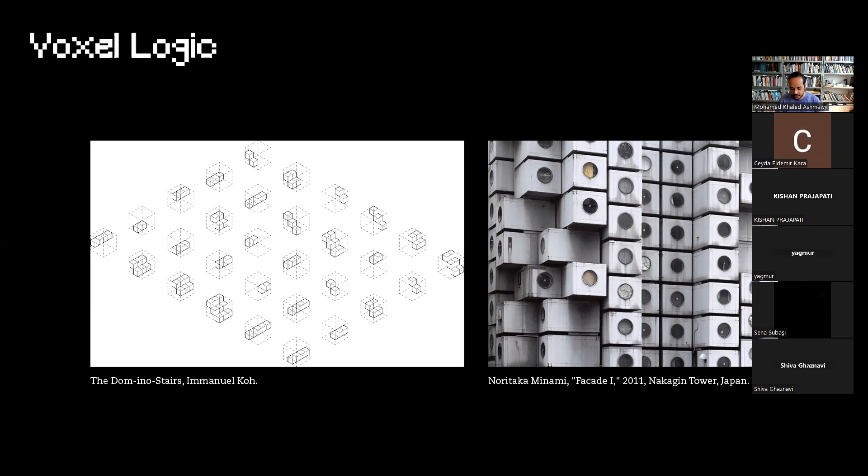And for this, the workshop is going to focus on 4 main topics in the 3 days. The voxel logic system: what is voxel logic, what are voxels, and some examples of how you can build a voxel logic system or an algorithm. And then we will talk more about gamification. We will check some examples like Sims, Minecraft. Minecraft, I think, is the most famous example of a voxel logic system that is very well gamified. How many of you actually played Minecraft?

I almost played every day. So, every day. Okay, good. Yeah. Also, Sena. Okay. Also, please correct me if I'm pronouncing the names wrong. Just please say, Mohammed, that's not how it is. Please focus.

Yeah. So I think Minecraft is a very, very good example. I got a lot of inspiration from playing Minecraft to develop the project. And then we will dive deeper into the Meta XR SDKs, how to use them to create an augmented reality or virtual reality application. We will check the new API they released, and how you can use the building blocks, which is the easiest way right now to build an application on Unity.

And at the end, we will do some C# scripting and try to develop our own Unity AR application. I will help all of you for sure, especially in the coding part. Maybe just to know, how many of you know C#, just a basic understanding of C#?

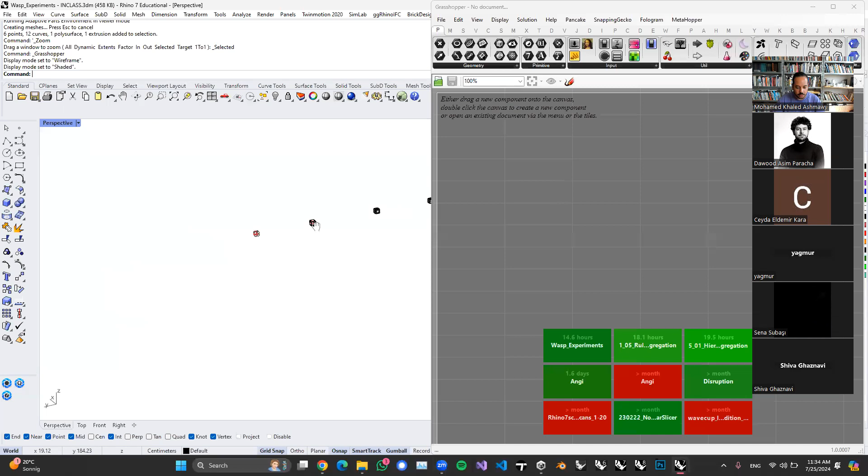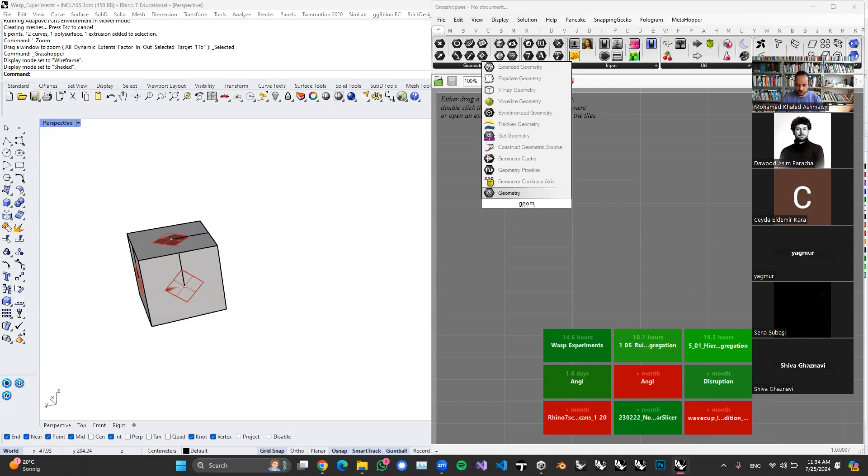So if you open the Rhino file, you will find 4 geometries here, 4 voxels, and we will start with this one. If you are completely new to Grasshopper and want to get a component, what you can do is double click on the canvas and then write the component you need. We'll just write geometry, here it is.

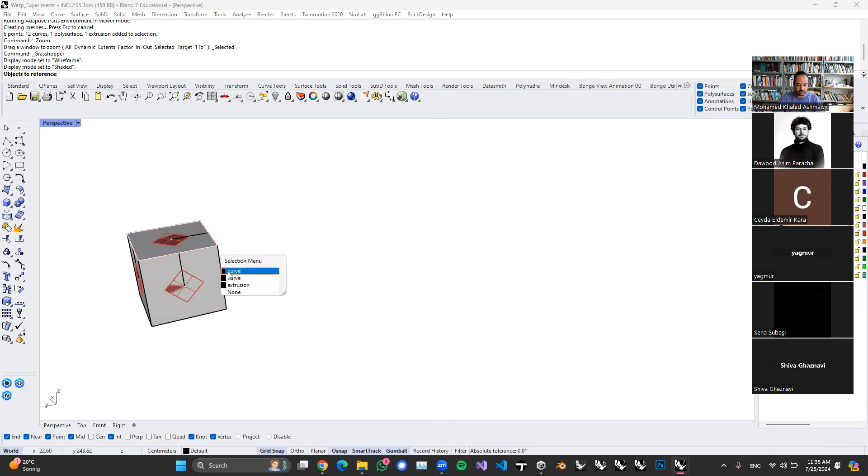One other way of doing it is to go over all those tabs. I have too many because I've been using Grasshopper for a very long time, but you shouldn't have all those tabs. So you go over the tabs and see what you need, we need geometry, we'll pick it and put it again in the canvas. If you right click on geometry, you can basically pick set one geometry, which is going to be the extrusion.

And then we will try to deconstruct this extrusion. So deconstruct BREP in order to get its faces. We need all the faces.

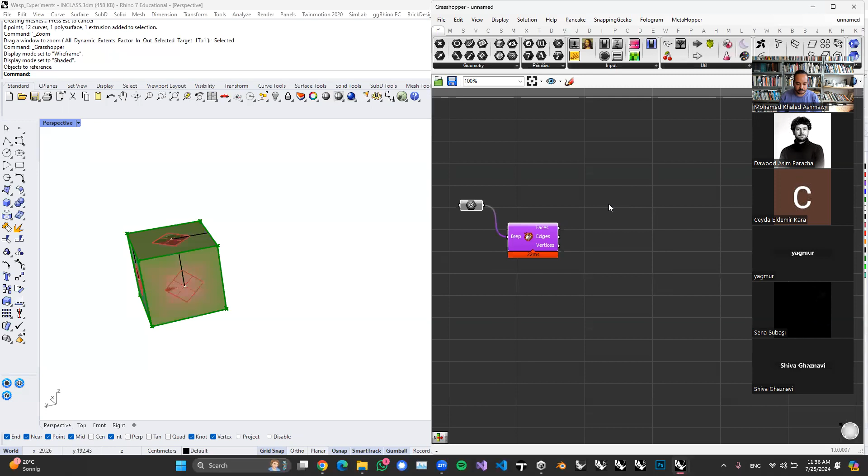Sorry, I need to explain this better. So the shape logic or the shape rules is gonna be created from the geometry itself. And in order to create this from the geometry itself, we have to go over all its faces to set up some planes. The logic actually works this way.

We will consider this as a voxel. You can see me on the camera, right? Yes, we can. Okay, great. So this is a voxel and this is another voxel.

If I want to, or maybe I'll use the cup. If we want to connect this face to that face, we have to get a plane on this face and another plane on that, so they can connect. And we connect from the center point of this one and the center point of the other one. So center point to center point, plane to plane, and then it's gonna connect. That's how it works, just to connect two basic geometries.

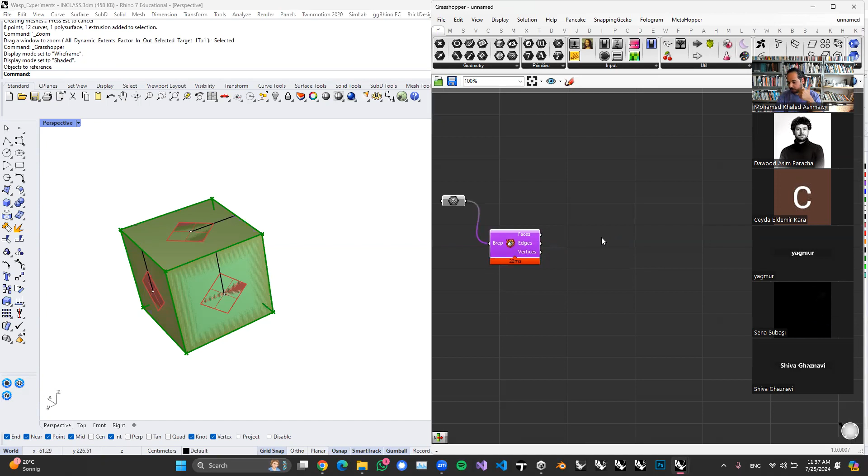So what I need right now is to get a center point and a plane. In order to get the center point, I will evaluate the surface and then reparameterize it. And then say, I want basically the point exactly in the middle. You see now what happened, right?

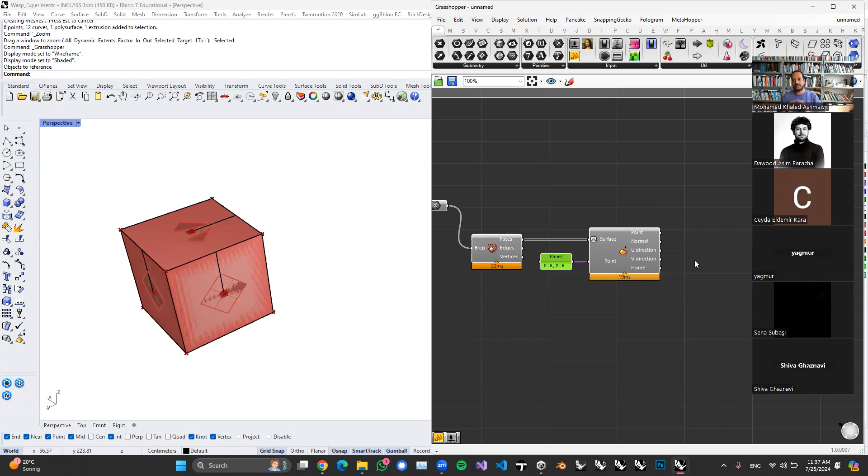I have the center point of each face and I have a plane as well already connected to it. But let's say I want a better setup for this plane. I want to define exactly the direction of the plane. Therefore, I need to use one of those two directions, the U direction or the V. It just resembles the local coordinates of this face basically.

So what I need is to create a line. And this line is going to start from the center point and get the direction of the V. You see now what happened, right? Great.

And then all what I need to do is to go into WASP. I have so many tabs, as you can see. But WASP has this set of components that you can use to create all kinds of aggregations, like most of the things you need.

As I said, if we want to have a connection between those two elements, we have to define the connection, and then we have to define the part that's going to be connected, the voxel part itself. So we will define the connection first, and therefore we need this component, connection from direction, because we already have a direction and we have a center point, right?

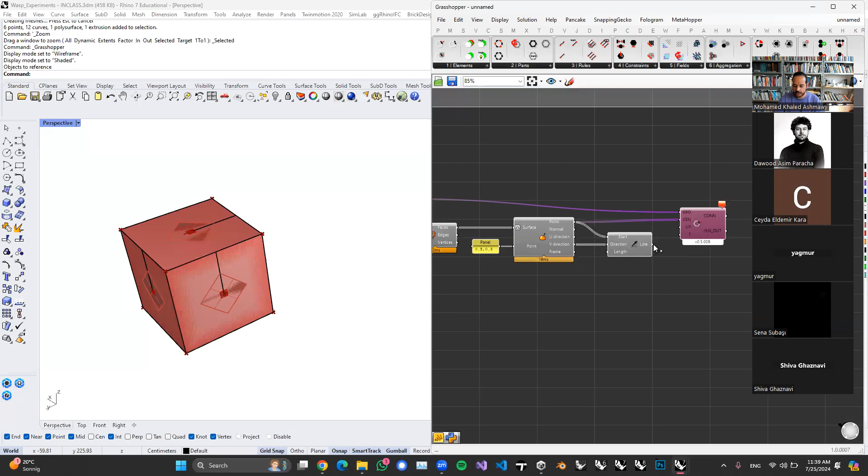So our geometry is going to be this. Center point is to center point, and direction to the line. And now we have a WASP connection for each face.

This means that every single face on this voxel can connect to every single face on another voxel. You can change this as you want. It's not mandatory basically. You can go to those faces and change its order, do whatever you want. That's up to you. But we will try to do the basic example right now.

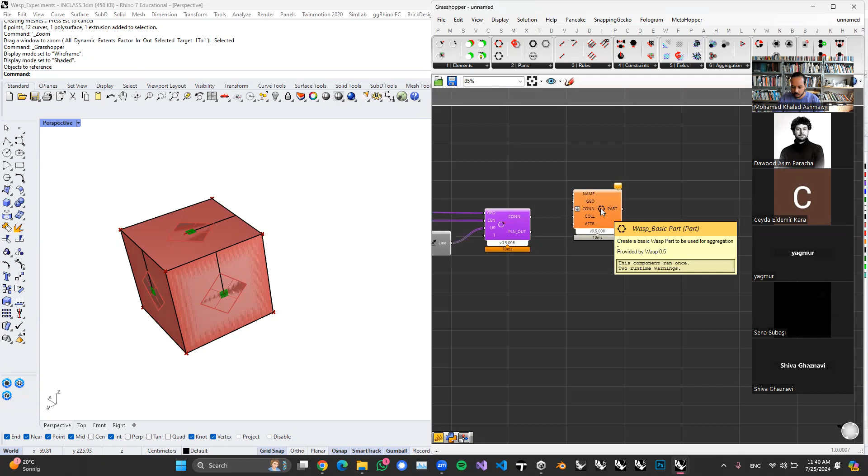And then we need to define the voxel part. Therefore, we need to use this component, WASP basic part. We have to give it a name because WASP is very sensitive to names, and how can I say it, like if you have a voxel logic, you have to be very, very cautious about naming, because naming always helps to deconstruct the shapes at the end and have more control over the whole algorithm.

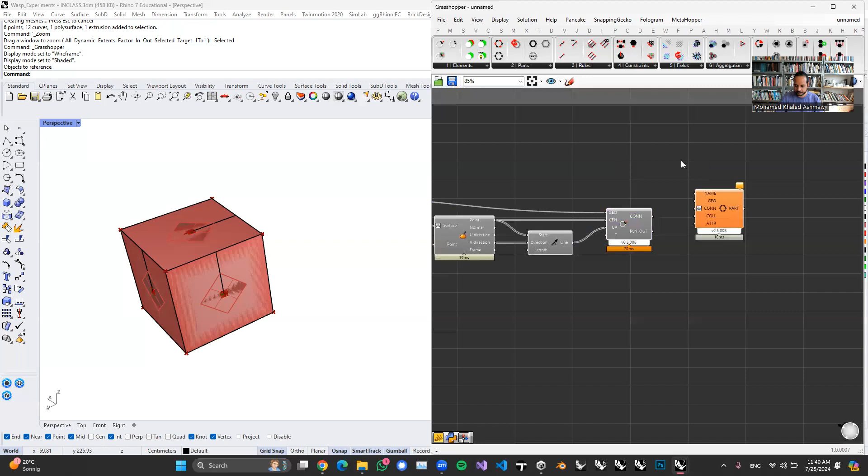And I will call it voxel. Okay. Voxel. Great. Then again, geometry to geometry, connection to connection, and that's it. Now we have a WASP part.

And all what we need to do basically right now is to do the aggregation. That's it. We will use this component, stochastic aggregation, part to part.

The number, let's say that we can start with 60 voxels. And we have to define rules for this aggregation. The rules are basically gonna be generated from the connections, right? We have already defined the connections. We defined the direction that we need, and then we can just type rules and pick WASP rules generation, because it's just gonna generate the rules from the connection.

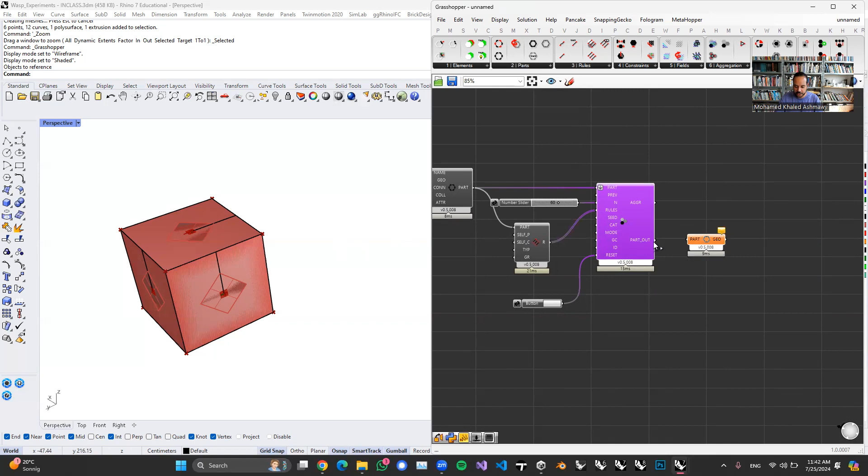Part to part, as always, and then rules to rules. Great. All what we need to do is have this button to basically reset the aggregation every time we need to do that. Okay, if I try to preview this, nothing happens for sure, because right now the only thing we have is the WASP parts. And we basically need to just visualize it. So we need to change the type from WASP part to a geometry.

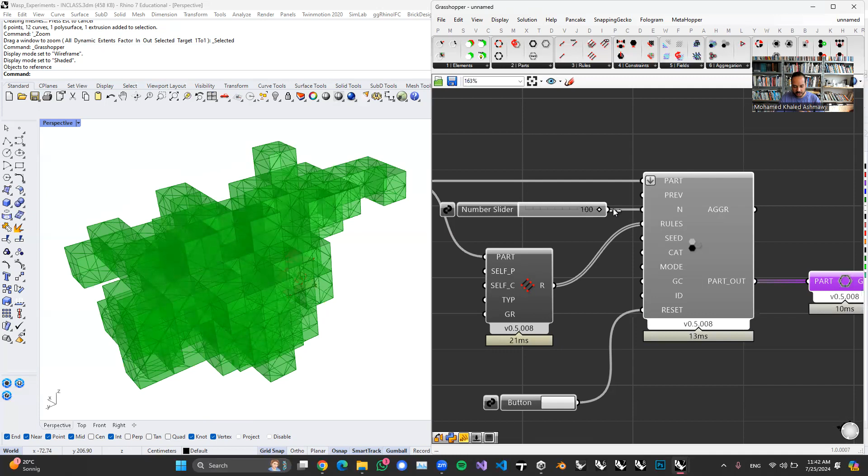And now this is basically our aggregation. We can reduce the numbers, we can go higher, and you can see that every time I change that, the order changes because it's continuously computing the possibilities. I'm just gonna start from 2. So this face goes to that face, and it goes over and over again. It goes over all the shapes, picks a random one, takes one of its faces and connects it to one of the faces of the next part. Because right now we don't have custom rules, we have this kind of random rule, but it's not really customized so far.

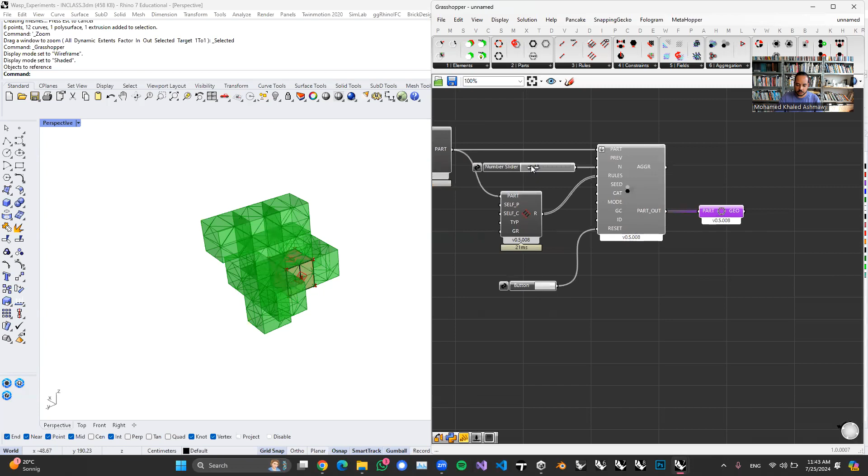So we have this beautiful aggregation at the end. If you are new to Grasshopper, you can type custom preview, and then you will have a material for your shapes. If you want to change the color, type swatch. We can pick this beautiful pinky color, and you can change the opacity, change the intensity of the color, do whatever you want. So that's the basic example of a WASP aggregation algorithm.

Is this clear? Give me thumbs up if it is. If it's not, please also ask your questions.

Please, can you use the bifocals component? Yeah, sure, okay. No, thank you. Better? Yes, thanks, okay. Yeah, thanks for reminding me. Actually, I also wanted to do that, but I forgot. Okay.

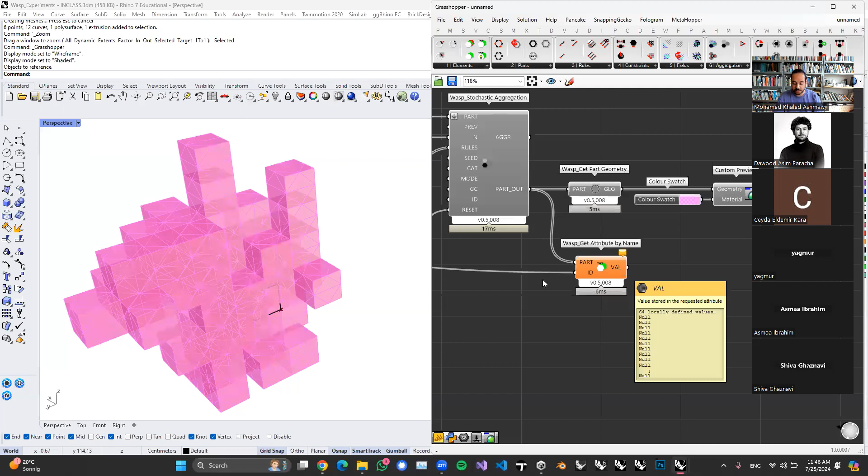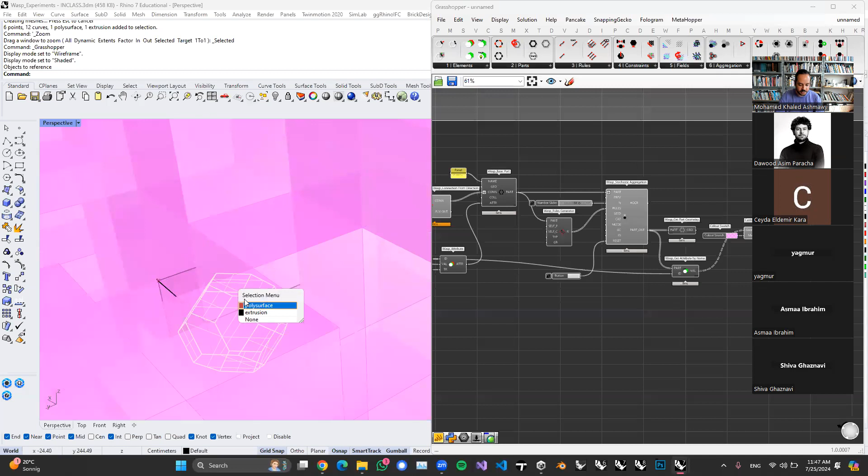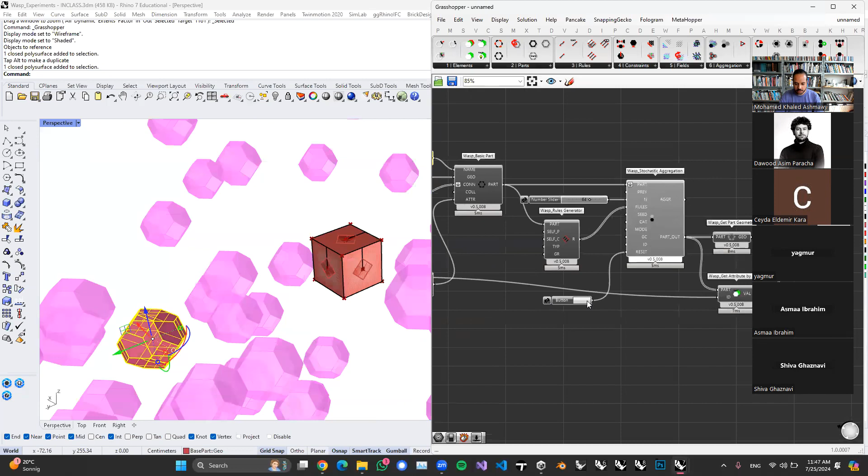This actually works for almost everything that can fit inside this box. I have already prepared some geometries — as you see, this amazing octahedron, we can already use it as an attribute. So I will define it the same as a geometry, set one geometry, put the geometry inside the value, and then... yeah, because it's okay.

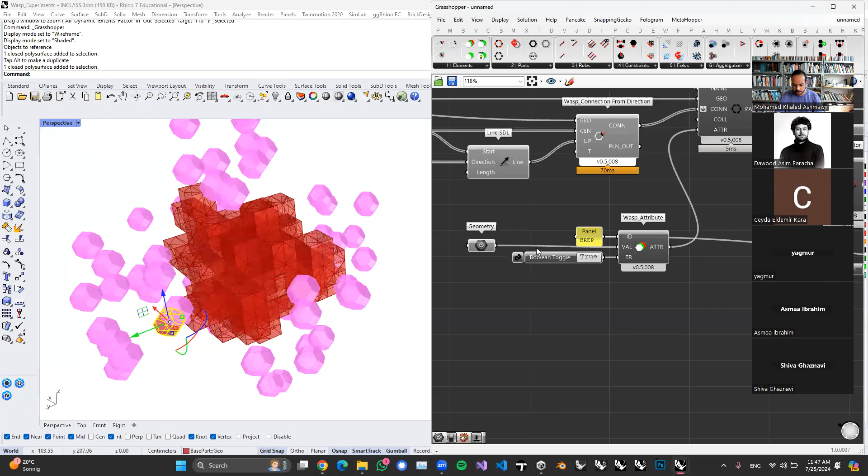That's actually quite interesting to happen. Okay, no, I know why. Okay, sorry for that — it has to be actually in the same center point. So...

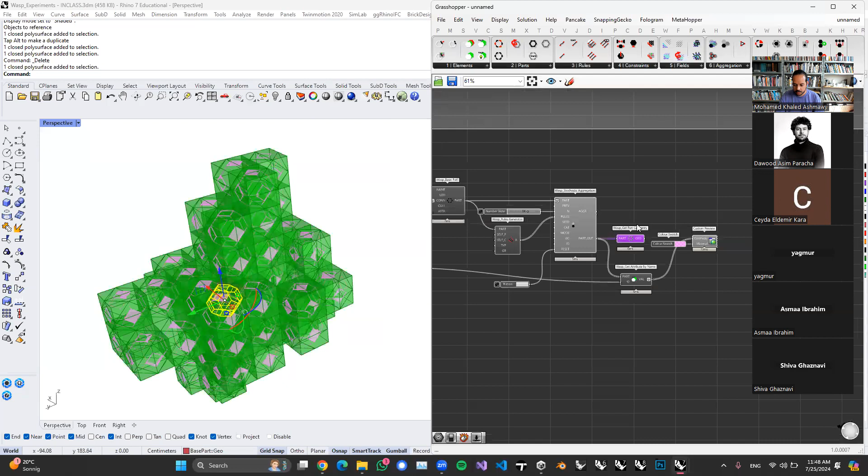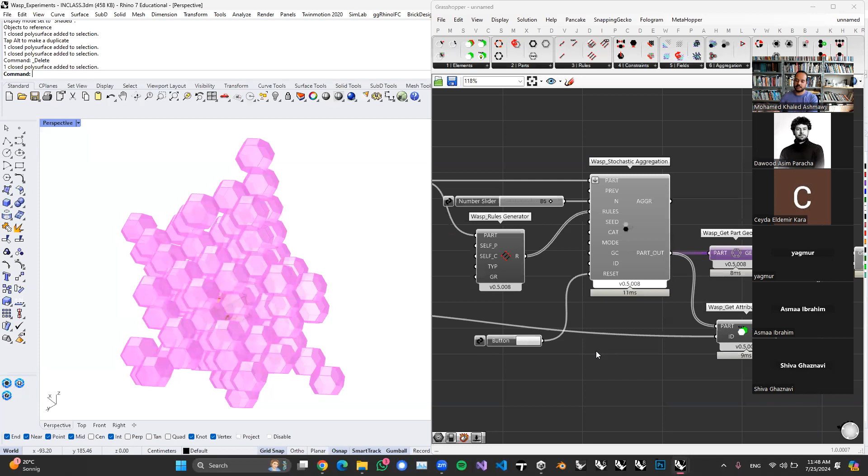Yes, now it is. So as you see, this is basically our initial voxels, and those are the aggregations that it's gonna fit inside. It works the same way, exactly the same way. I believe this is actually the beauty of voxelization — whatever you want to voxelize, whatever you want to aggregate, just fit it inside a voxel and aggregate this voxel, and then you are basically done. If you just need to get a hierarchical aggregation of any shape, fit it inside a box, do the hierarchical aggregation for this box, and then you are good.

So, is it clear? Do you have any questions? Okay.

In the file you have, I already prepared multiple shapes to fit inside. So you can play around, you can use the octahedron, you can use those kind of cross structures. Just try to play around and understand how it works. And as I told you in the beginning, we will try to deconstruct every example that I have showed, and therefore now we understood how voxelization can work using WASP.

Let's actually try to set this up for the Nakagin tower and check how it works. How can we actually create the same shape in the same order and have infinite aggregations out of this?

I will do almost the same setup. Nothing is gonna change, only a few things. If you want to follow up with me, use this voxel here. In this voxel, I have two things basically — I have the extrusion and I have the poly surface.

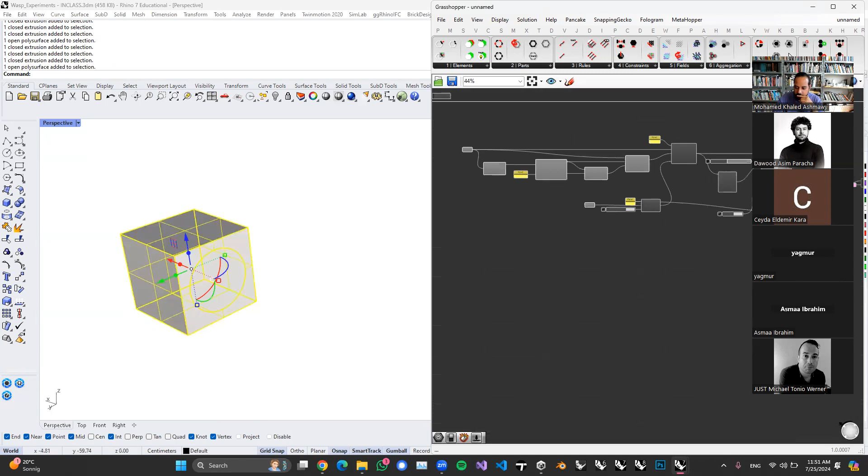Okay, now it's time to create the tower, right? And to create the tower, I will basically use the same setup. Not a lot of things will change. I will use a geometry. In the geometry is gonna be the extrusion, the voxel itself, set one geometry. And then I will start to create the connections.

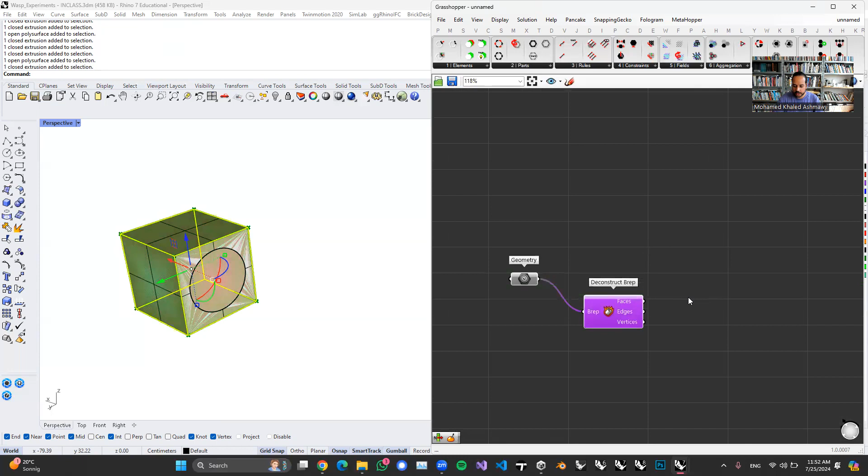So I will deconstruct the BRep. It's really interesting. Yes. And since for this example, we actually don't need to have connections on the sides, then we need to basically have a top and bottom connection. This is our first introduction to custom rules, basically. So for that, we need to basically have a connection for the top and a connection to the bottom.

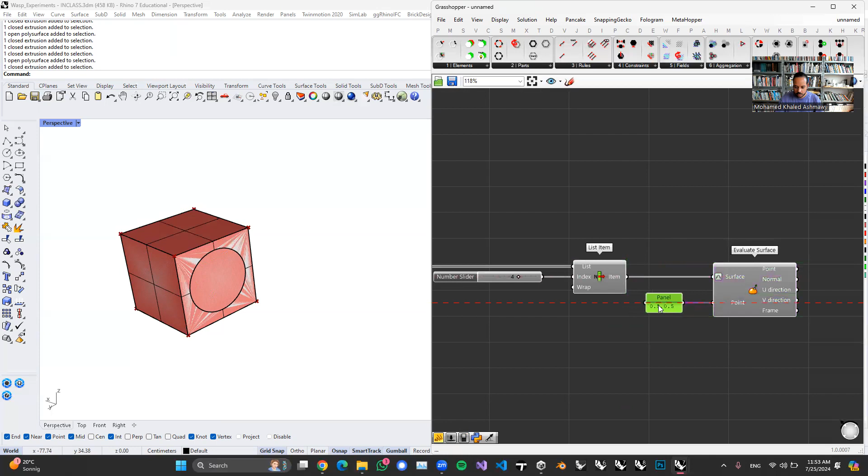You can use the list item component. 6, right? So 0, 1, 2, 3, 4. 4 is the bottom face. So this is the one we are going to start with right now in order to get the connection. And then we will evaluate the surface, try to reparameterize it so we have an accurate estimation of the points. This then should be the center point. Yes, great. And then we need to create a direction, basically.

So a line. And then we set up the directions, right? And then we need to set up the connection. So connection from direction. Again, geometry to geometry. Center point or points should be basically the points of those lines, because now I have two. So I'm gonna use endpoints to get it. And this is basically the direction. And now we are good.

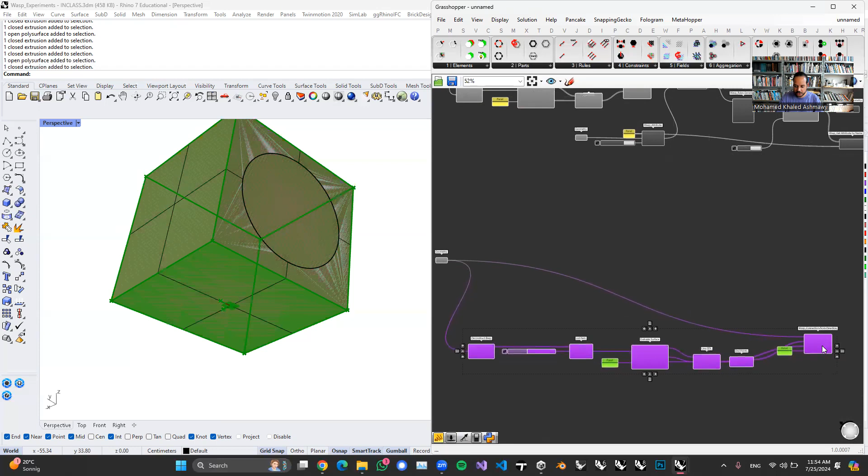One thing that we can actually do here is to give every connection a name, because we have multiple ones. So we will call this bottom. That's the first connection. All we need to do is just copy paste it to create the other connection. We will go here and see which one is the face above. So it is basically number 5. And then we have already the lines, we have the directions, we have everything. As I said, it's a parametric approach, so it shouldn't be a big problem if we just copy paste stuff, change one thing, and everything is gonna work the same.

Great. Now we have connections, but for this one, we need to change the name to top. Great. And I think now we are good. We need to create the part. For this one, we will use the advanced part. Personally, I just want to introduce you to it, but you can also use the basic part. It doesn't matter. We will give it a name, and we can call it capsule, because they call the parts in the tower capsules, right? So geometry to geometry, connection to connection.

And we need to basically set up attributes. Why? As I told you, we use the attributes to basically fit anything we want inside the voxel. And this can work for multiple objects. So if you want to put this cup basically inside the voxel, you can, no problems. But you can also add more details to your voxel. So if you have windows, if you want to create some kind of, I don't know, slabs, columns, whatever details you want to add to this voxel and put inside, you can use the attributes for this, okay? So we are going to have an attribute for

So we go back to Rhino. And we will do the first thing first, to have a groove detail. I will call it detail.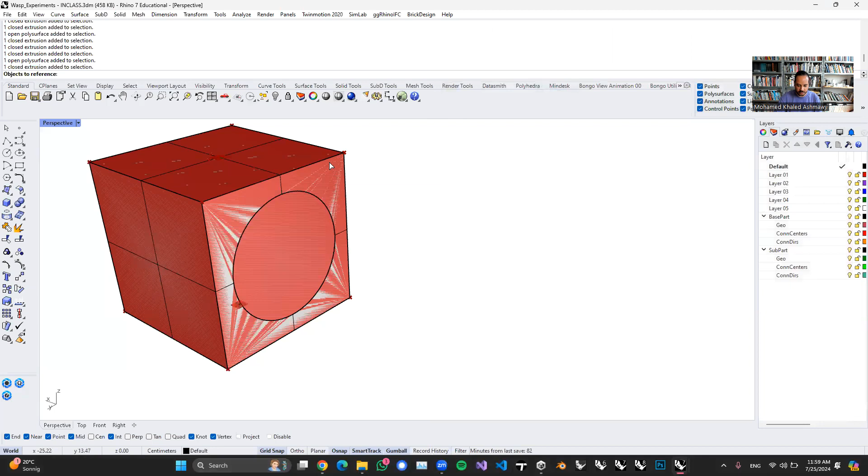And just to get it, I will do a new geometry, set one geometry, and then I will pick the poly surface. Okay. And just a toggle to enable it and disable it. That's basically number one. Number two, we need to have a window, right?

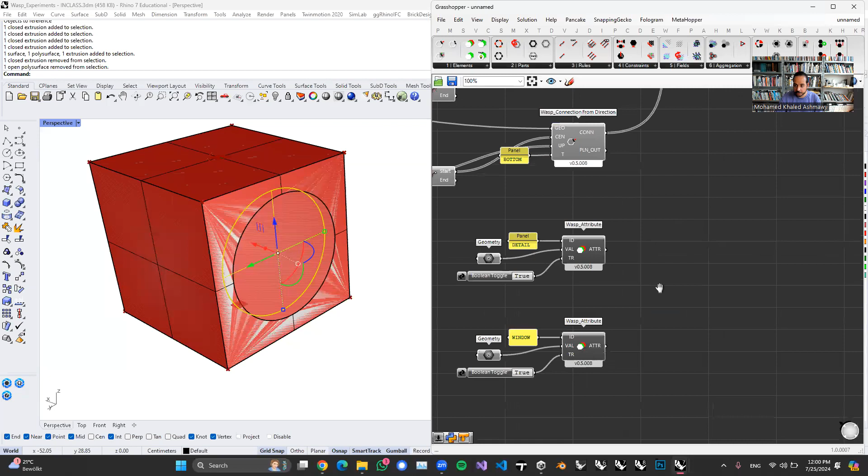And for that, we need to set up the geometry that is somewhere here. Yes. So this is going to be our geometry basically for the window. And as we did, attribute to attribute, and then shift-drag to attribute again, and then our part is basically ready. What do we need to do today? We need to have double the size of this voxel.

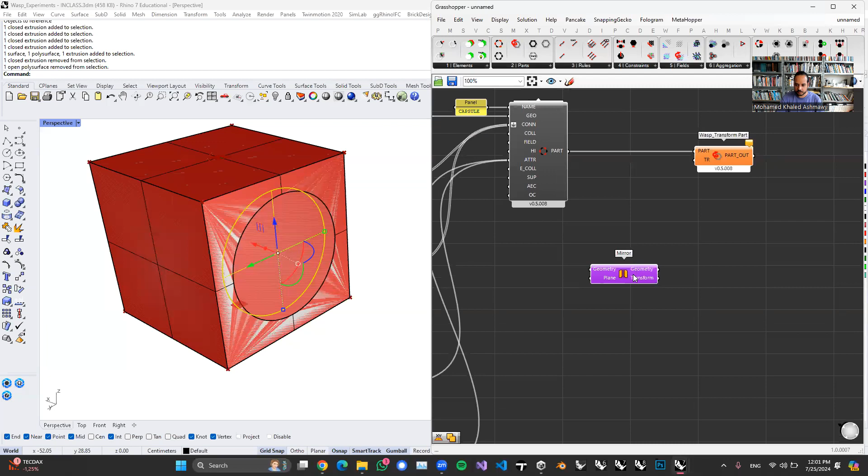And in order to do this, we have a component for transformation of the WASP part. So WASP Transform Part. It's just a replacement for a move, but in the logic of WASP. What do we need to do? We need to do part to part and then mirror this object, right? So mirror. We don't need to attach the geometry because it's going to be the part. We just need the transformation.

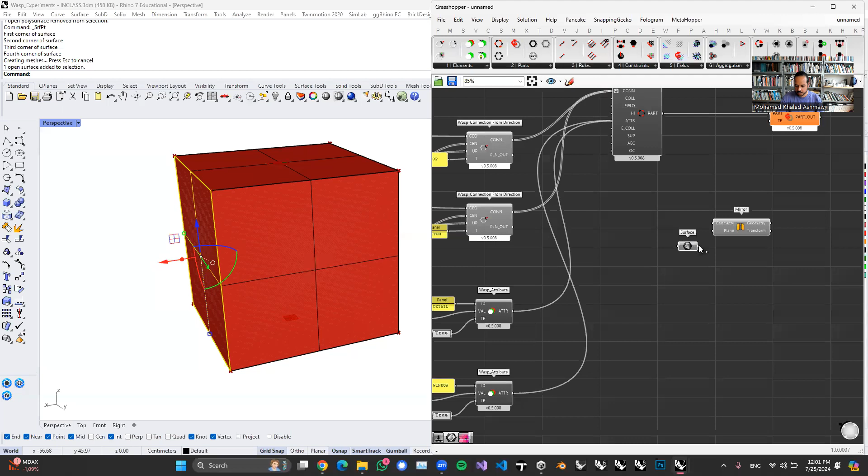And we need to set up a plane for the mirroring. And I think the only reasonable plane is going to be this one. You have two options to do this. The first one is just to create a surface like this, right? And then this is going to be our plane. Set one surface, and then plane, and then transform. And then our part should be ready.

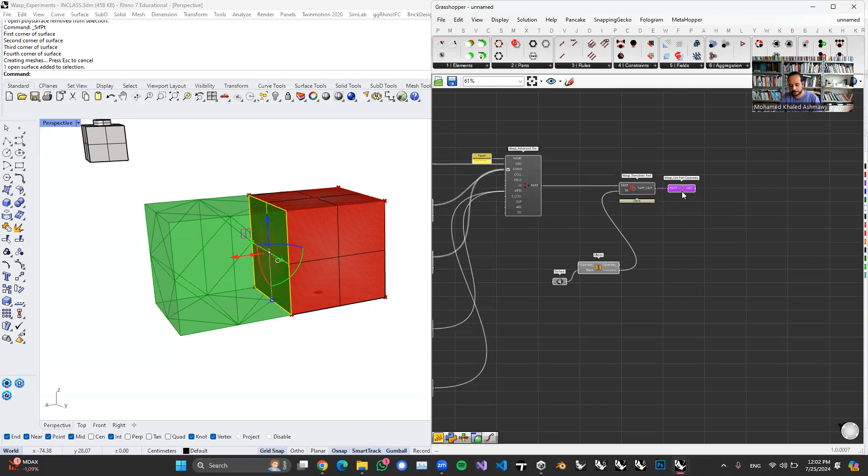If we try to visualize it, we can see it already here, right? Fine. I hope it's understandable. Great. I think what we need to do now is to create the aggregation, right? So we will start with aggregate.

WASP has a very interesting way of not showing up, but that's fine. Sorry. So part to part, we will set a number of 30, let's say. And then we are going to generate some rules. But first, what I forgot to do is to create another part after the transformation. And in order to do this, it's also the same. I will call it full capsule.

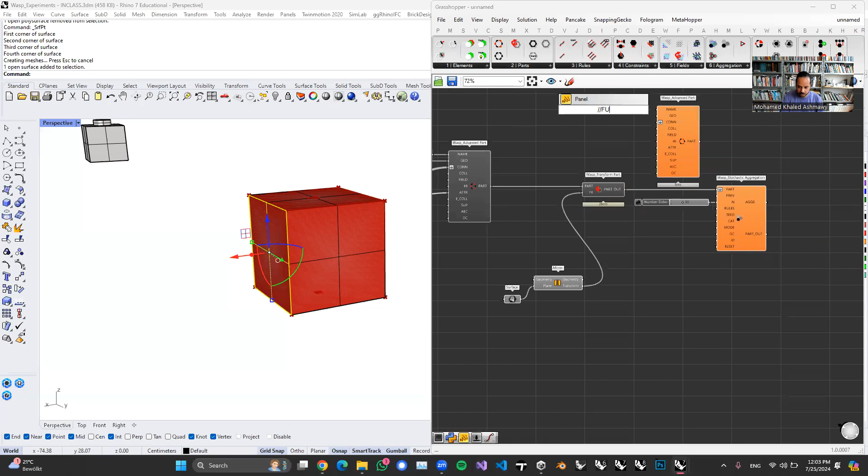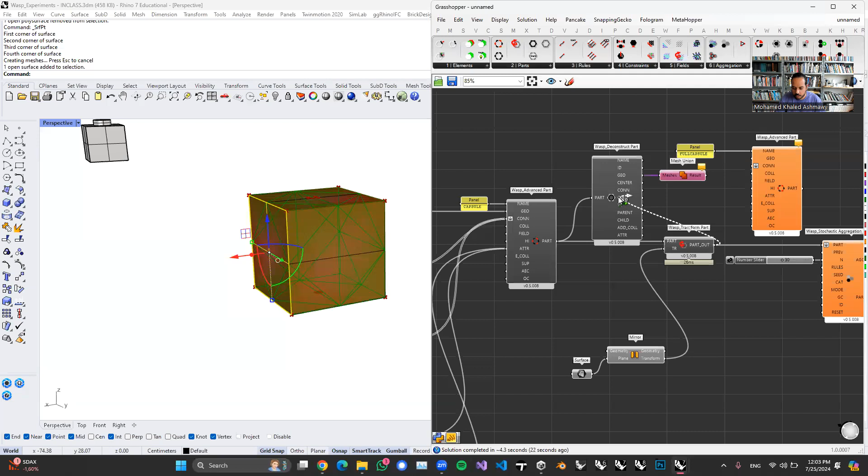And then the geometry should be the deconstruction of this one. So it's going to be those meshes, basically. And then we have one mesh at the end. This is going to be the geometry, and then connection to connection. And what we need to do now is to also connect the attributes, right?

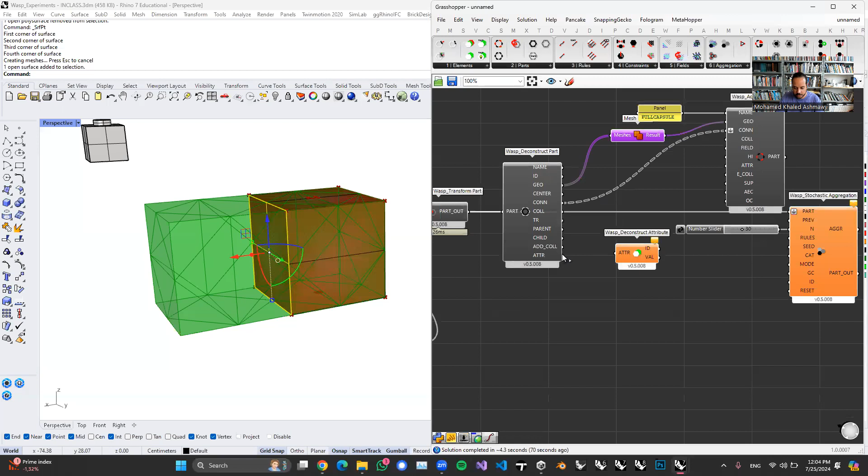Please let me know if you have questions or if you don't understand why we are doing this right now. So we need to have a transformation of those attributes. So we will deconstruct it. And as you see here, that's actually the full capsule that we need. And it works fine. I will just try to match the text.

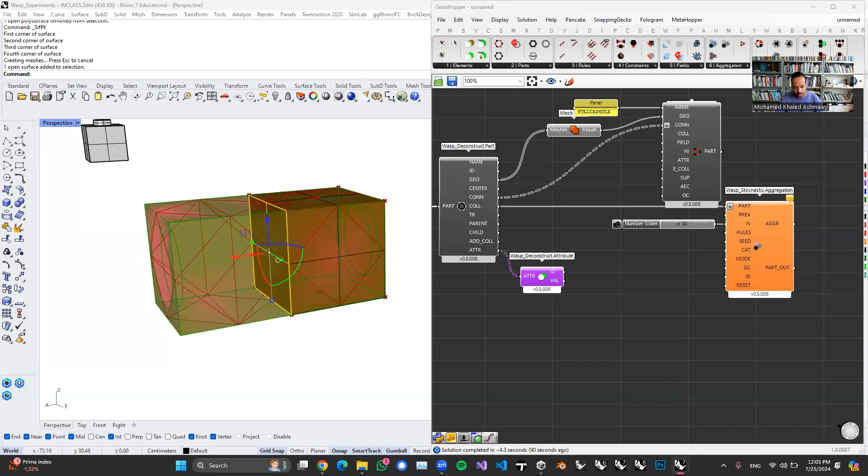So text to text. I need to just copy-paste it. Yes. In the text, I would just try to match detail. So we check for every object that has the name detail, and then give it the name again here. Then we have the attribute again for the new shape.

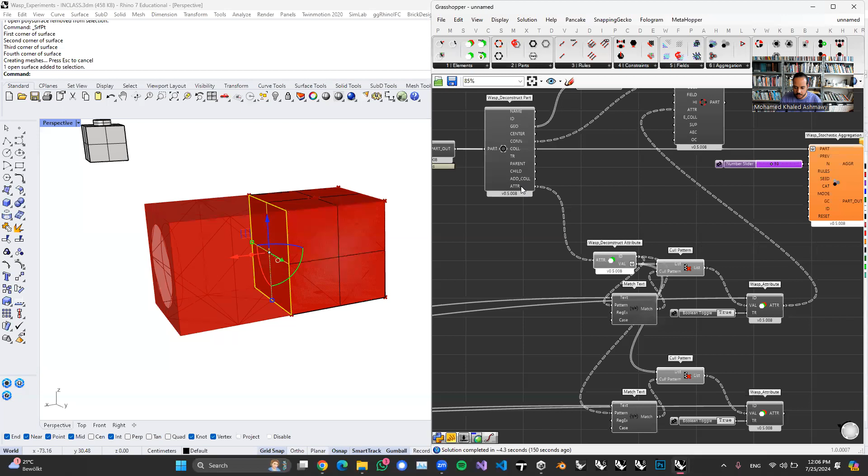And then we do the same. Check for every object that has the name window, and then give it the name window again for the new double-sized capsule. And then attach it to the attributes here. I think first I need to fill this out. Yes. Great. So part to part, number to number, and then we have to create the rules again.

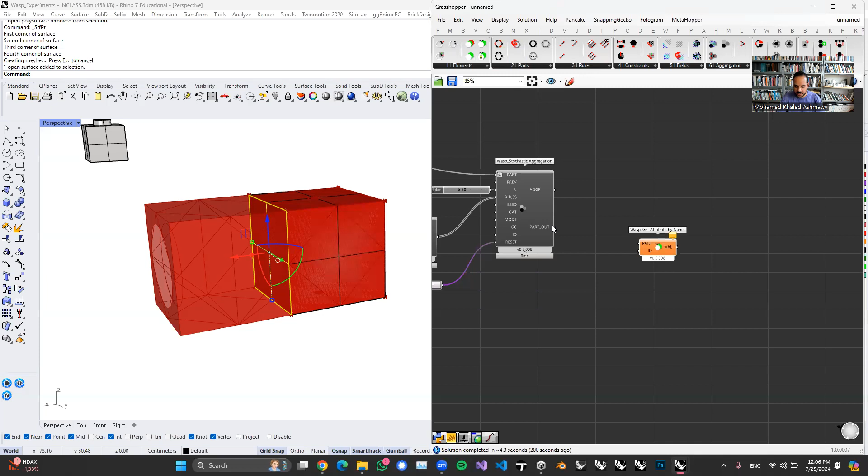That's my favorite part. We don't have to think about anything anymore. And then we just add the rules. And then in order to show everything, we need, not a toggle, the button to reset the aggregation. We will have to do the same thing that we did the first time to sort by name. So part to part, and then I will add the name detail to see a detailed version, and that's it actually.

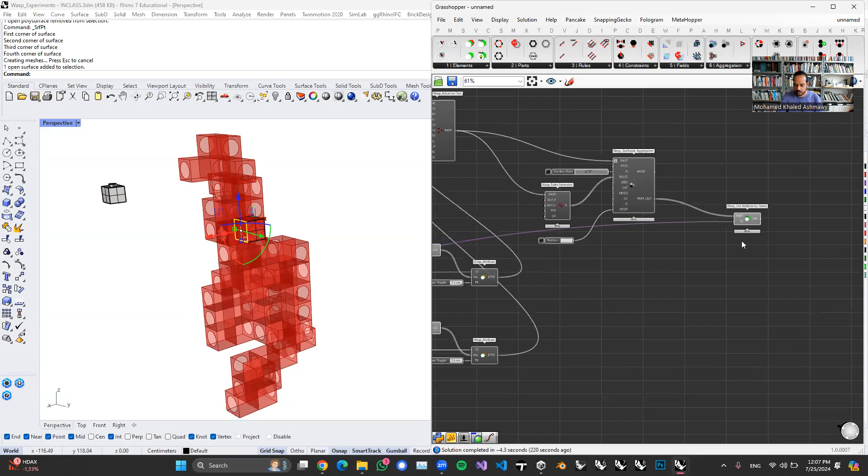So now you can see it. If we want to do the same and get the window, then I just need to connect window to ID, and now the window is also visible. Good.

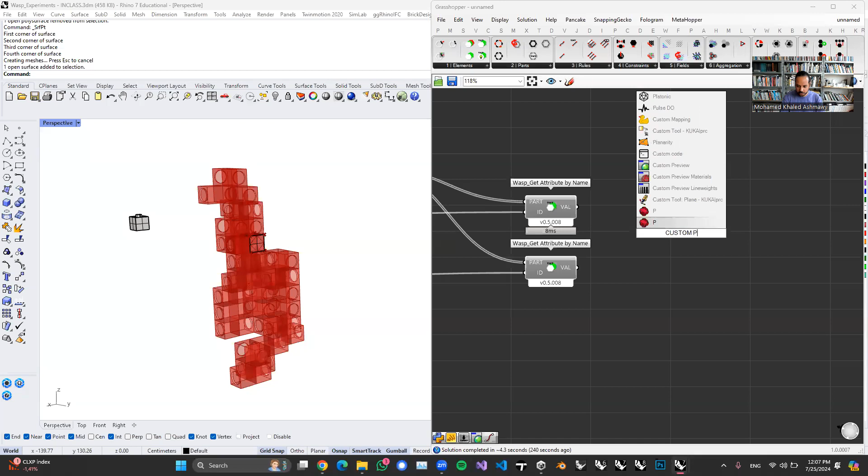As I told you, we need to do a custom preview component to give some colors. Let's try to give it some kind of concrete color. Or do you want something else? If you want another color, you can also tell me.

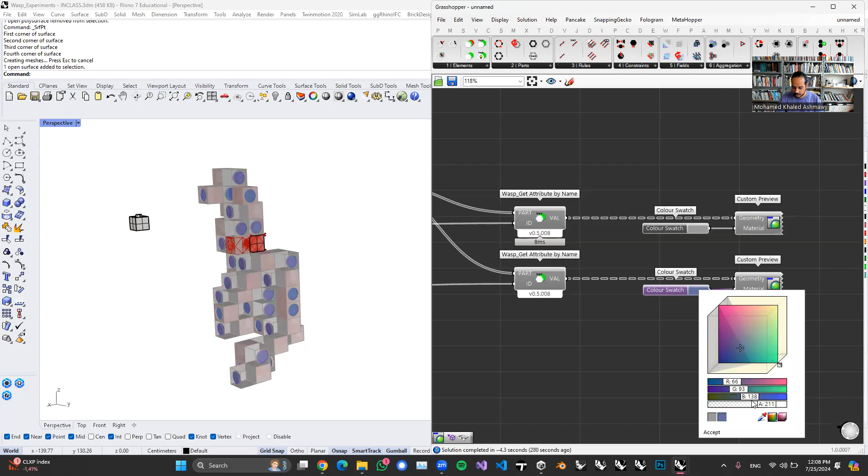Good. I'd like to have it faded a bit, and then also give a color to the window. Maybe something in this direction. Something like that. Yeah, and we can have more of those. We can have less for sure. We can reset to create new variations.

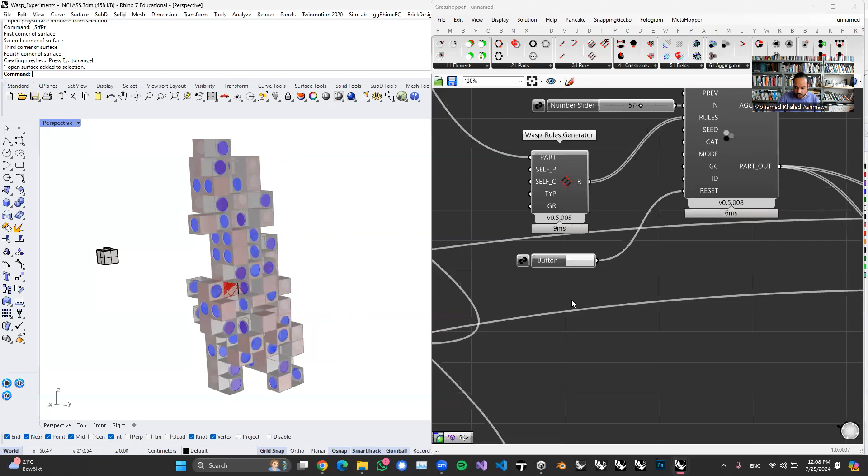And as I said, once you start to understand the logic of aggregation, it's actually easier to do this in Unity. We can't jump into the Unity part completely without understanding the custom logic of aggregation. Now we have a good setup, right? Now we know how to create shapes like the tower.

Do you have questions? Is it clear? How many of you can actually follow? Okay, can you maybe just tell me a feeling? It's actually quite hard to be the only one talking. I need some interaction. Sorry, your feeling?

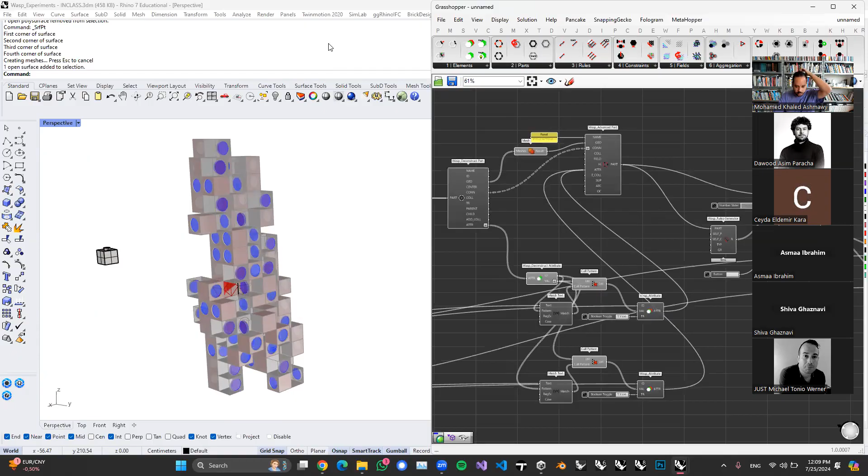Could you please share this algorithm with us? I only have my laptop and it's very difficult to follow the video and also try to work on Grasshopper. So I miss some components, and because of this, it's a little bit hard. Okay, I can just upload it right now. I will stop sharing. Thank you so much. Yeah, now it should be in the same folder. Okay.

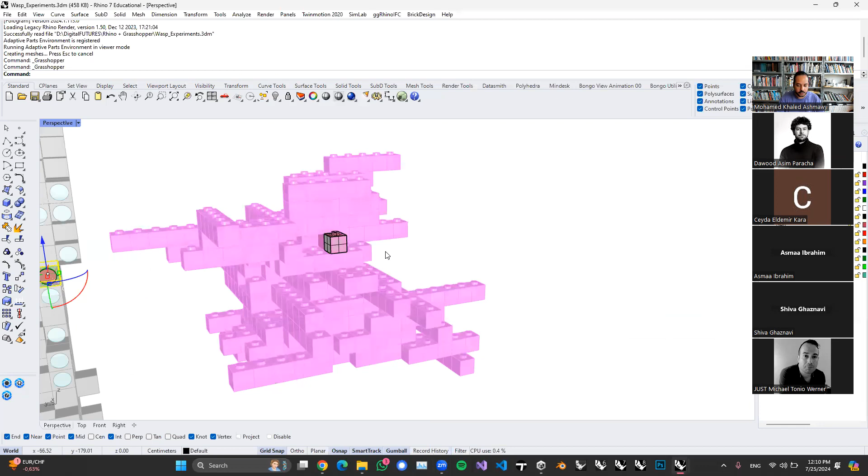Last but not least, and I would say it's my absolute favorite actually, is how to create an algorithm to build Lego objects. I already have a setup that I have developed before. Can you see it now? Yeah. So this setup basically gives me the opportunity to create multiple Lego aggregations. And I can have more of them. I can have less. I can change the order of them.

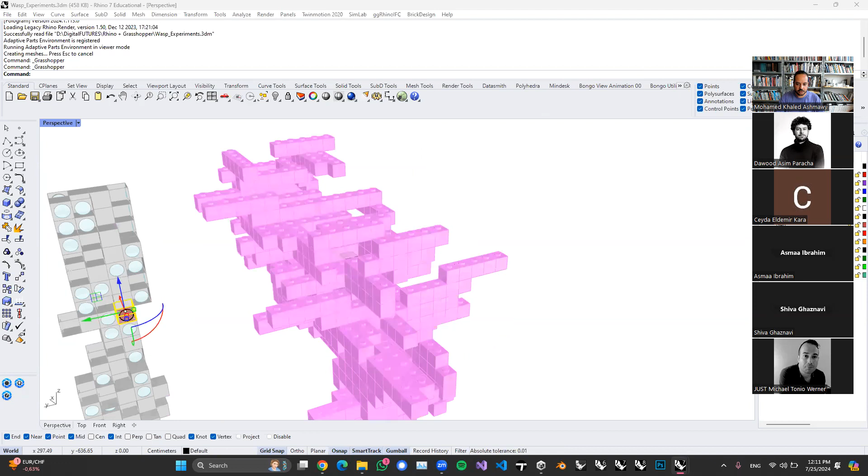And I will also explain it to you now, because I think it's one of the most important things that we are going to check in this workshop. At the end, it would be super nice if we can develop an application that simulates some Lego logic, but at the scale of buildings. The good thing about augmented reality is that you can build in real scale, right? So you can use the lenses, you can use the controllers to do basically the exact same thing, but in real scale and in a real environment.

One of the tests that I did before is a Minecraft game that I designed at a real scale of blocks 1 meter by 1 meter. And we used it here in the university to basically rebuild the campus again in augmented reality. And I think one good example of this, and what I want to collaborate and check with you, is how we can also try to do this for some custom Lego objects.

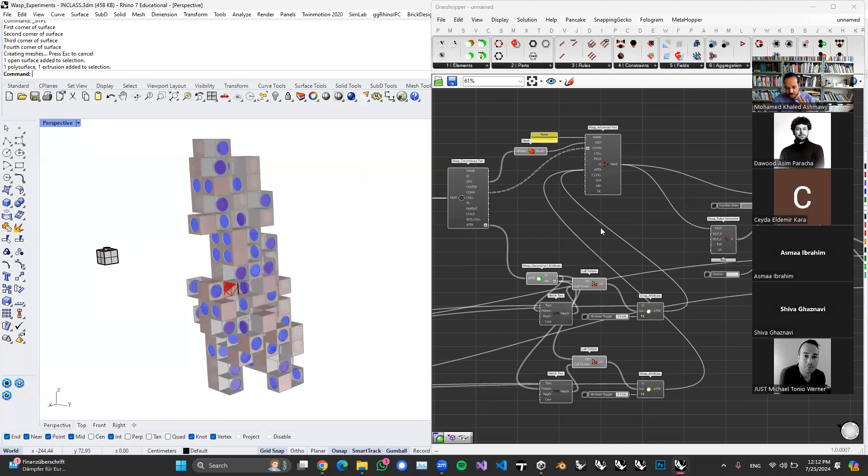You will find this example in the Grasshopper file I have shared already. You will also find the voxel, it should be this one. You can experiment with this, but just try to follow along with me to build it yourself. So the setup is, as I said, exactly the same. We really don't need to do anything more. We can just copy paste the part that we have done here. Just copy, paste it. I just need to change its name to Lego.

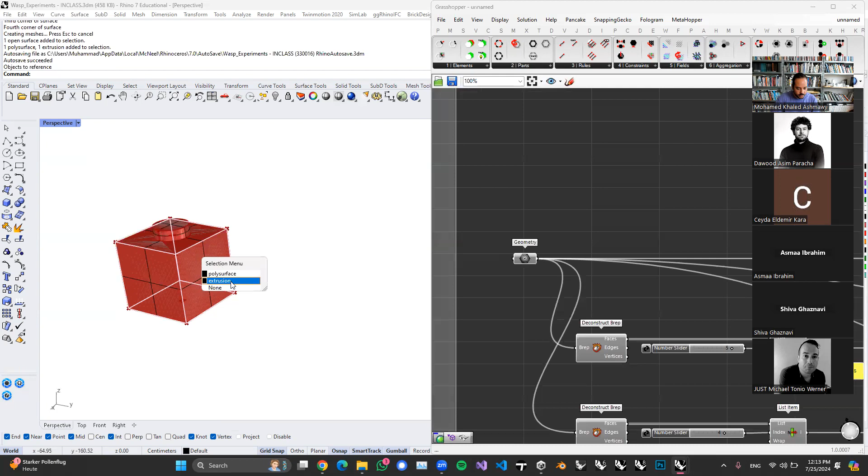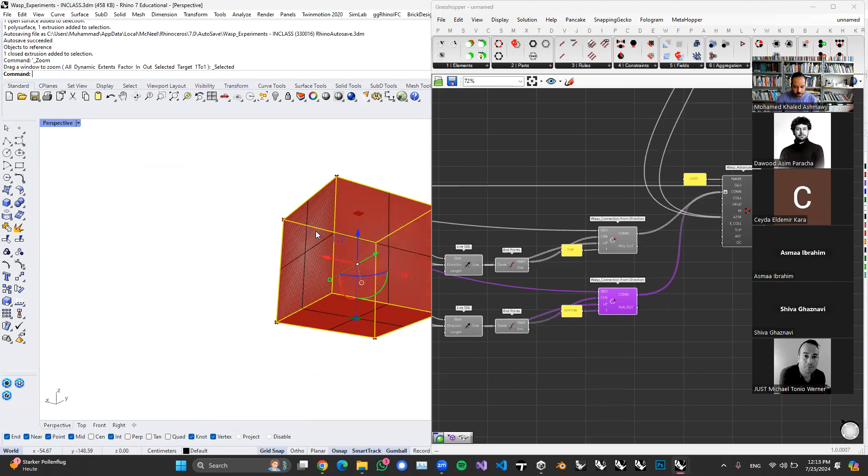And set the geometry, which should be... I think it shouldn't be this one actually. Yeah. Okay, maybe, yeah, it should be the extrusion. This should be the first object. And it's going to be exactly the same. If you look here, we have the top connection there. We have the bottom one. Yeah. So we have our connections already from last time. And we just need to set up a new attribute to have this custom shape of the Lego.

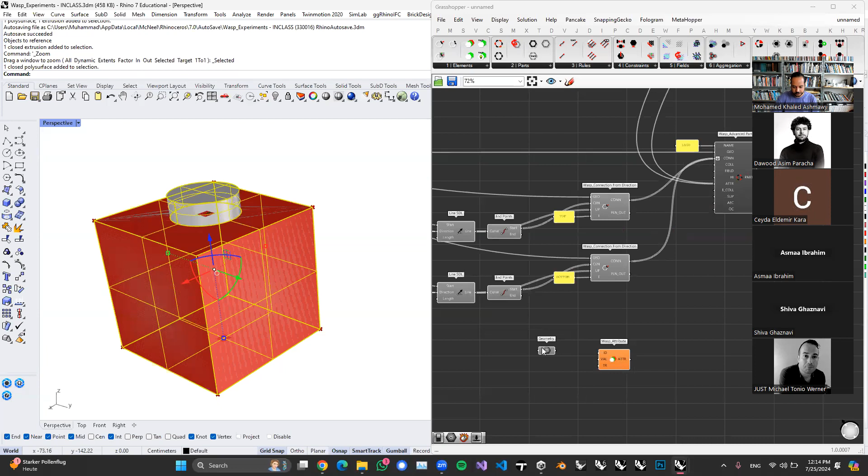So geometry, set one geometry, should be this one. Great. And then we will have a name for this. I will call it Lego brick. And then we need to toggle it. And just need to connect this to attributes. So basically that's it.

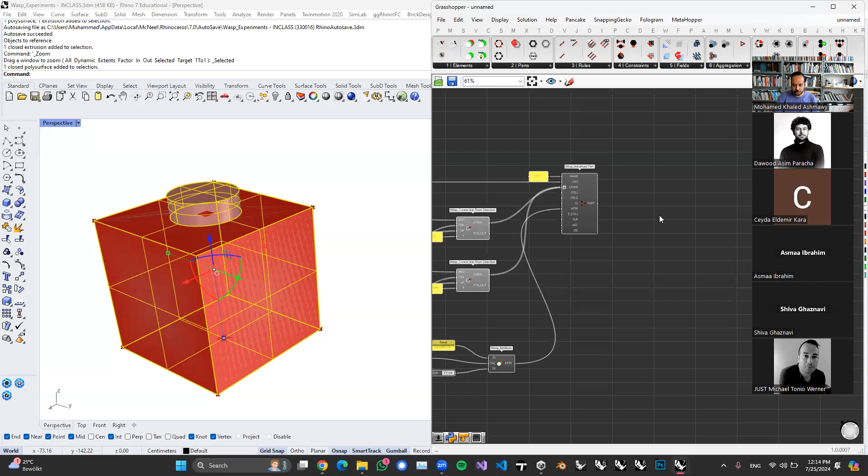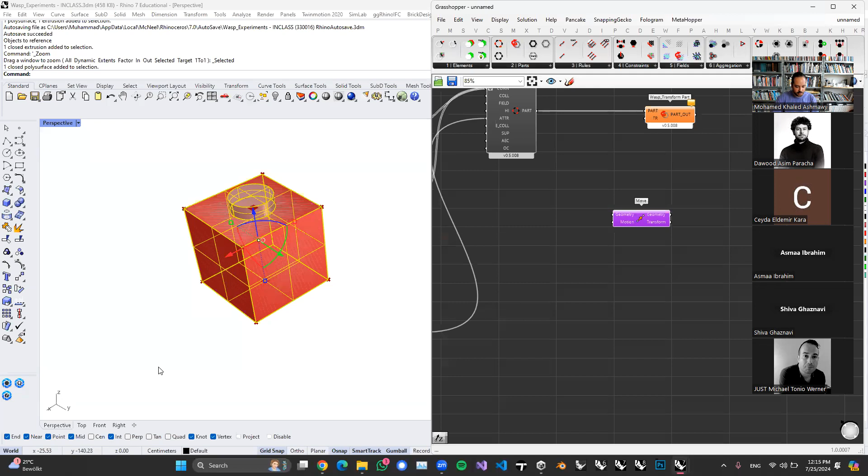And then, like last time, if we want to have double the size, triple the size, even 5x the size of this voxel, we need to do the transform. So transform Wasp part to part, and then we need to do the transformation, which should be a move. And this move needs to be in a direction. If you look here, this is X, Y, and Z. I would go for the direction of X. So this is the direction of X.

Put it in motion. And then we actually need to create multiple moves, so we need to use a series for it. This is the size of the voxel itself. It's 13 centimeters, and I need 5 of it.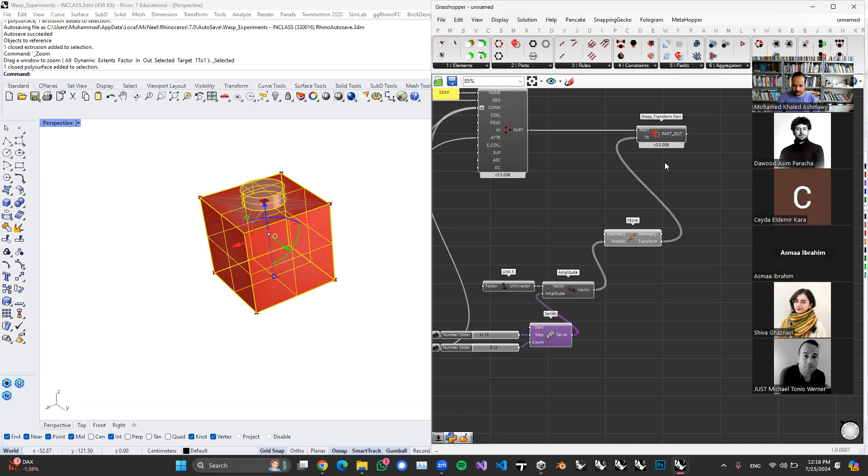Great. And then we need to attach this transform. And if we try to visualize this, here it is. Those are the 5 blocks in one. If you see, we can have however many you want. We can stick to 4 right now. And then we need to deconstruct this part. Again, I'm making the same mistake of checking for the parts.

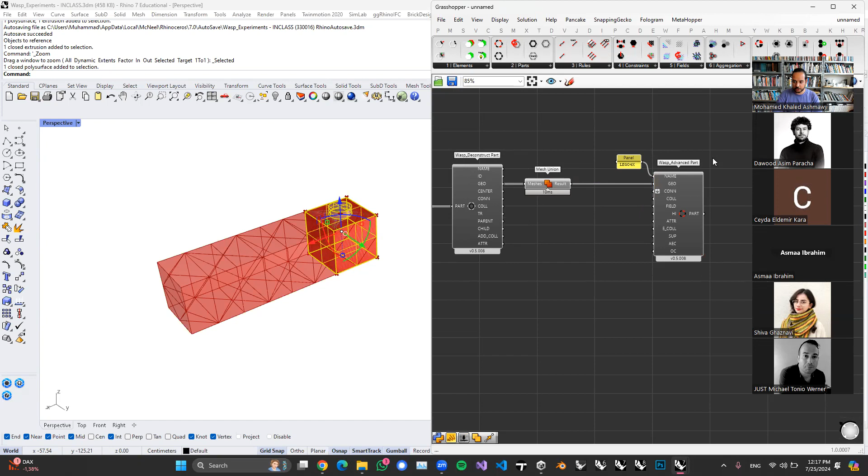Great. If we deconstruct it, we need to have all the shapes at once. So we need to union the shapes. That's it. Great. And create an advanced part again. So geometry to geometry. The name now should be Lego 4X, let's say. That's the name. And we are going to also deconstruct the attributes again.

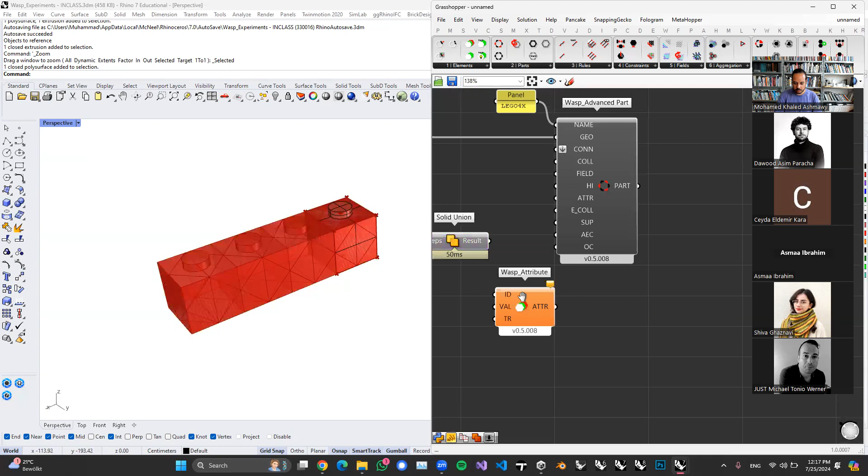Connect. You can see already here, it's started to be the Lego brick that we want. And then we will take the value of it. Try to union also the B-reps. Now we have one B-rep. Good. And we will create a new attribute of the unified geometry. We will use the same ID, which is Lego brick. And we will set a toggle to activate and deactivate it. Great.

Now the best part is to do the aggregation. So part to part, maybe we will start with 20. And we will generate some custom rules this time, not only the normal ones. In order to create a custom rule, we need to type it. So we need to do top to bottom, bottom to top, because it has to be stacked. This is how Lego bricks are stacked: a brick, and then another layer, another layer, and another layer.

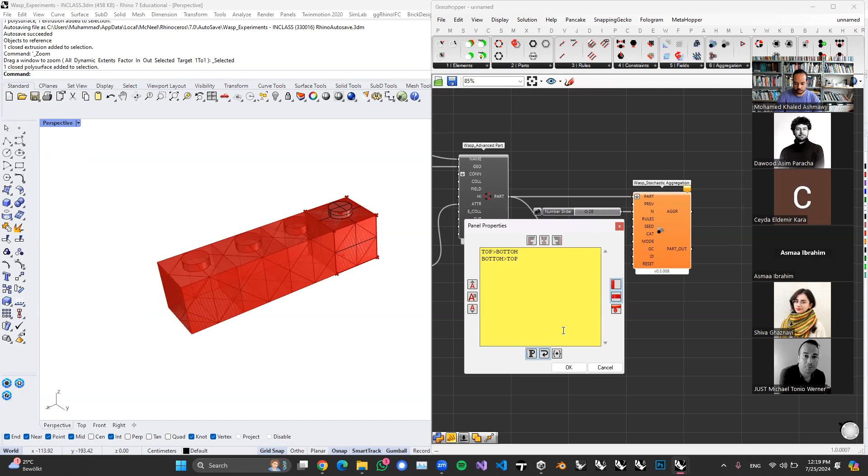So for the first layer, we need to connect top to bottom of the next one. And for the next one, we need bottom to top. So I will write this: type top to bottom, and then the next should be bottom to top. We will multi-line the data, so it's a list. Put it here. Now we should have the rules, hopefully. I think I messed up the connection. Yes. So now we should have some rules. Great.

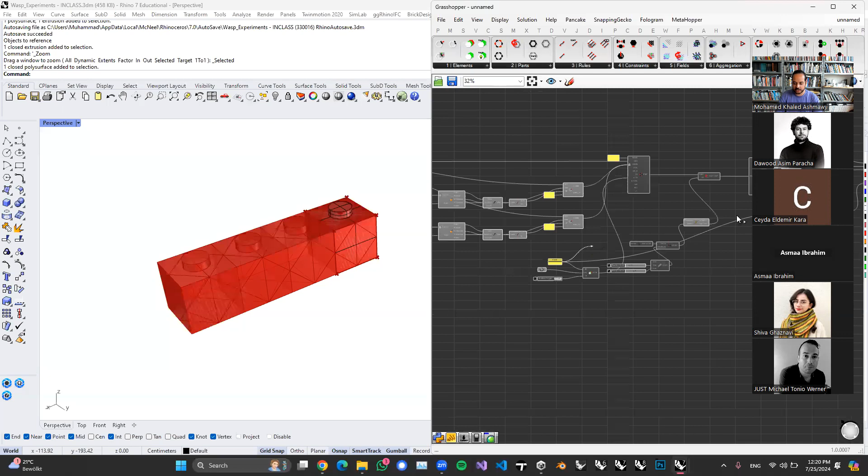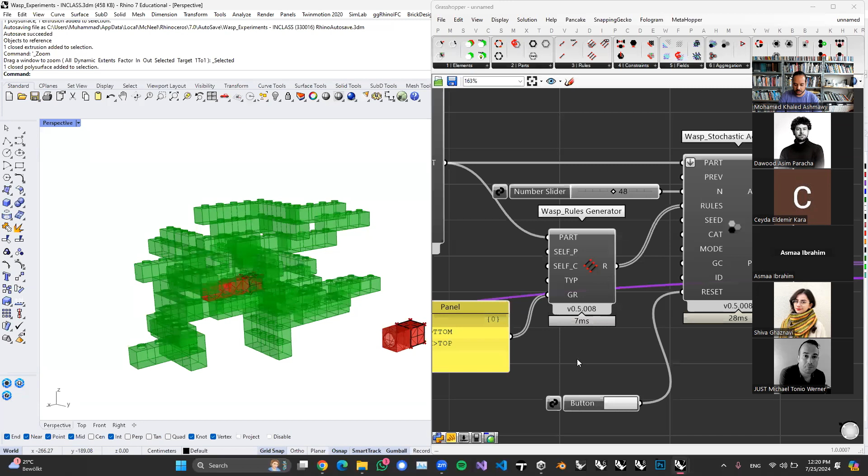And we would just add it here. And then we have a button to reset everything. In order to visualize the part, as we did multiple times, is to get attribute by name. So part to part, and connect it to the name, which is Lego brick, the detailed version of it. And now we can see it. That's an aggregation of Lego bricks, and you can see it's perfectly aligned. So we can have more, and we can also change the order of it.

And one thing that I love, and used a lot to create games, and maybe this is the first game we will do today, is to check for those objects. So I will flatten it. Now we have exactly 48 objects. I will get the center point of those objects. Every center point has XYZ, so we will deconstruct those points to get the Z value. And Grasshopper has something amazing called sort list, which will sort all those Lego bricks in a way we define, in a hierarchical order.

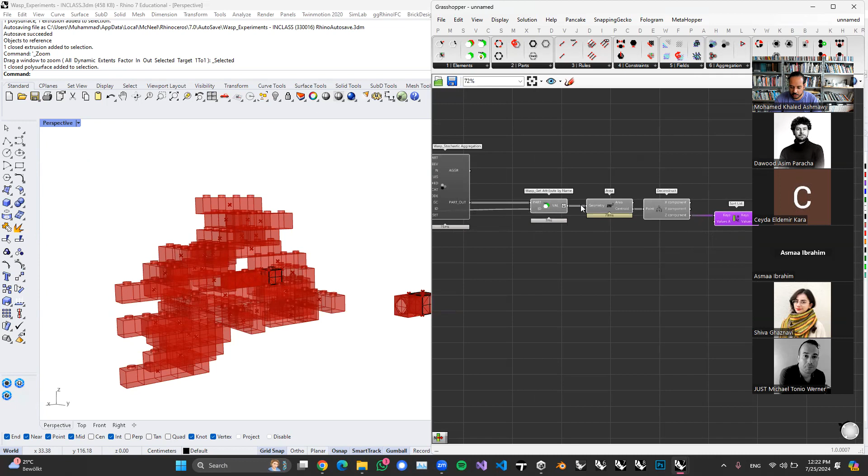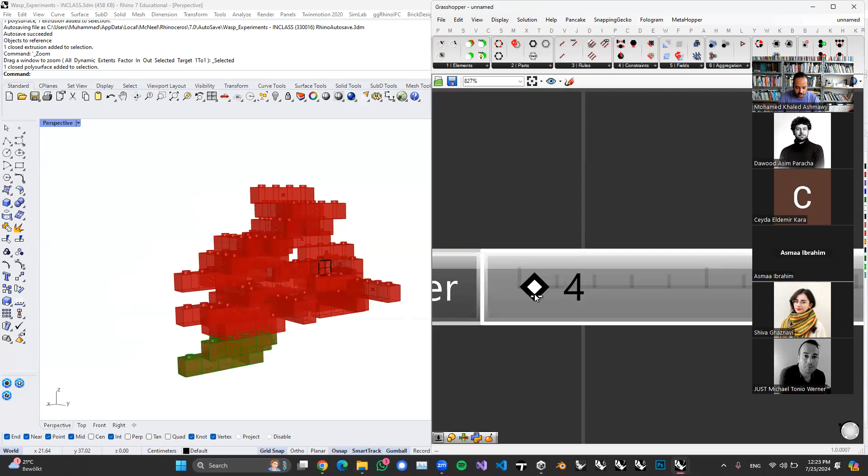So I want the base first, layer number 1, then layer number 2, and layer number 3. So this is going to be our keys, and those are the things we want to order. List item. So we have the first one. And if we create a series, and the count can be 4, then we will select those objects based on their hierarchical order. So this is the first one, the second one, the third one, and we can use this as an assembly guide.

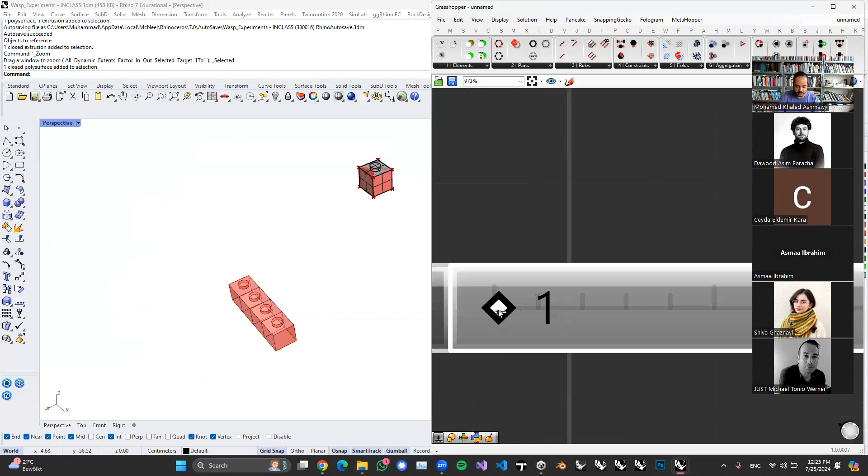If we hide everything, so we only see our game, we can see that this is number 1. Number 2 will be next to it. Number 3 will be on top. Number 4, 5, 6, and so on. This will be a really nice way of assembling the structure we created from the algorithm. We created an algorithm for the aggregation, and the game is to sort it and get assembly instructions for how to build it. And now we have our complete set of Lego.

If you want to change the initial setup, have different objects, or different colors, all of this can be implemented with exactly the same method, you will just need to add more details to your attributes.

Okay, it's almost 1.5 hours now. So time for questions. Now I finished my first part of explaining aggregations. If you think about it in a way,

if you have some experience with Fologram, you can basically connect your phone to Grasshopper right now and only visualize this component in Fologram. And once you do this, if you have the same set of Lego, let's say, you can basically do an AR assembly game right now of Lego objects. If you have any Legos at home today, just check the dimensions of this.

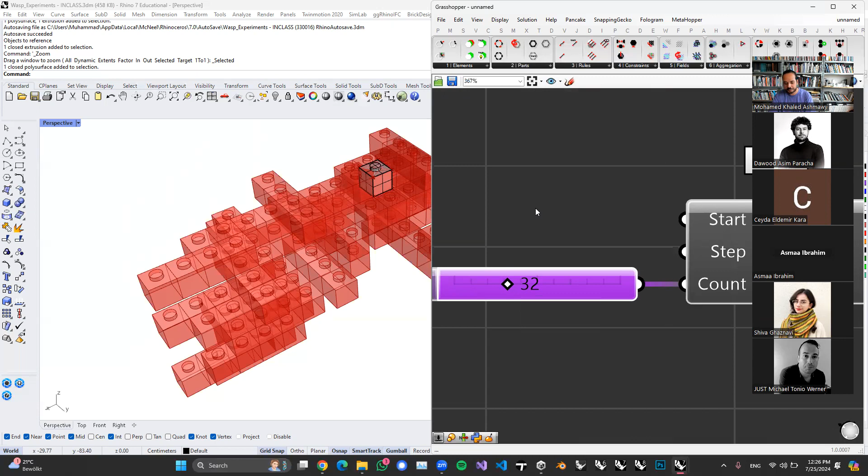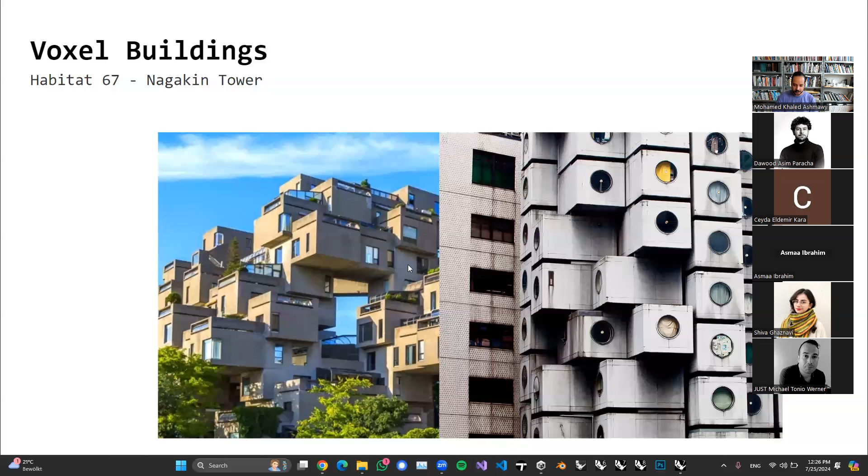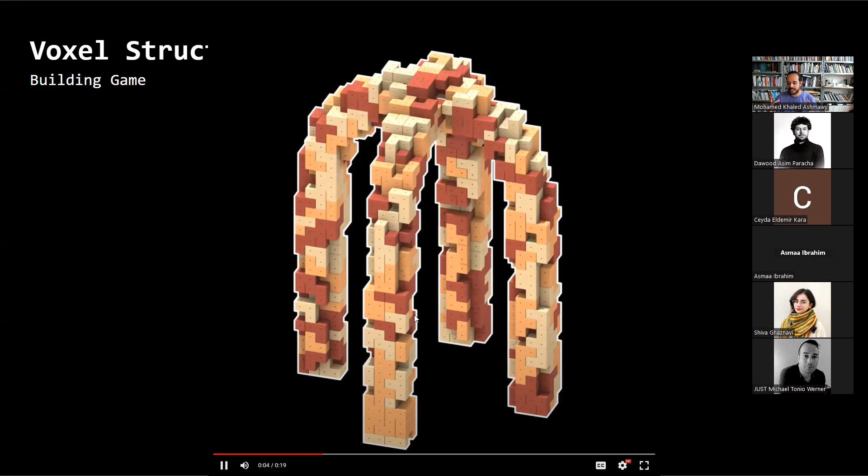If you have this kind of pavilion, any kind of surface or a B-rep or anything, you can also use WASP to populate it with your shape, with your voxels. And then you can have this kind of shape generation algorithm that is turning in augmented reality into an assembly game. And now we have Lego at home. That was the aim of the first session, the introduction that we had today in the morning. So now it's your time to give me some feedback.

Hi. If we want to create a boundary surface of this, like I have one form, like a sphere, and I want to aggregate in the sphere, then what kind of command can we use to aggregate in this shape? So you want to aggregate the sphere inside a voxel? I want to generate one boundary, like now it's aggregating on one algorithm, but we make one boundary so it doesn't go outside of this boundary. Yes. Okay. So how is it possible?

So you want to basically aggregate a sphere, and this sphere doesn't have to fit the boundary of the voxel, right? No. Like our last exercise with the Lego. The Lego is oriented in a tree kind of geometry, but we restrict it to one sphere. It grows like a tree, but if we make one boundary, the shapes don't grow outside of this sphere. So the sphere is going to be the boundary surface kind of thing. Yeah. So the sphere should be the boundary, and we should fit the Lego inside. That's what you want to say.